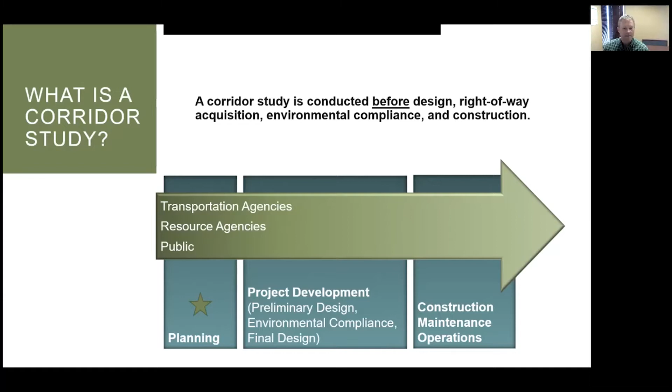All right, thanks Vicki. So I'm going to go over what we're going to cover today. First things first, we're going to go over the goals and purpose of the study. Then we're going to give you an overview of the existing physical features and some of the traffic conditions we've analyzed. We'll get into some of the environmental characteristics, and I'll have Emily step in and help with that. Then we're going to get into the next steps in the study process and get everyone up to speed with the schedule and where we're going, and then we'll open up for questions at the end. I have Lisa ready to show some interesting ways that you can comment and submit information to us.

So let's talk about the goals and purpose of the study. Like Vicki mentioned, we're going to start with a high-level scan of the study area. Then from that information, we're going to get into developing needs and objectives, which are essentially statements about what we know the corridor issues are and how to frame what we're going to look at as far as improvement options moving forward.

Improvement options could be anything from small improvements in the near term to large improvements in the long term. With that information, we'll estimate costs, assess potential environmental impacts, and look at the overall feasibility of each alternative. Then we compile all that information and data for use in the environmental process if a project moves forward out of this study.

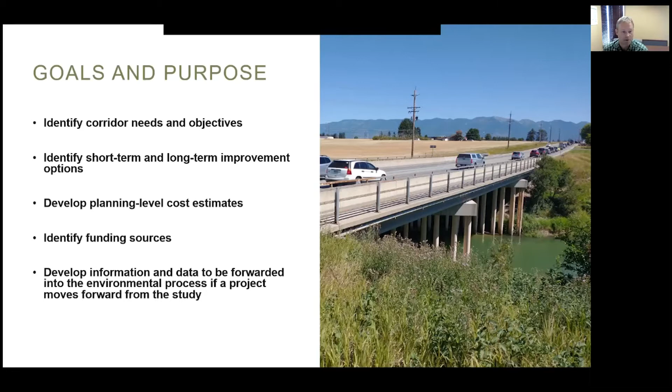So let's review the study area and background information from the research we've completed to date. Our study limits extend from US 93 at the intersection there, all the way to US 2 at that intersection. It also includes a segment of Whitefish Stage Road for about a half mile north of West Reserve, and extending about 300 feet south of West Reserve on Whitefish Stage Road.

We always look at these study areas as kind of a buffer. In this case, our study area includes a 250-foot buffer on each side, for a total of 500 feet on each of those roadways.

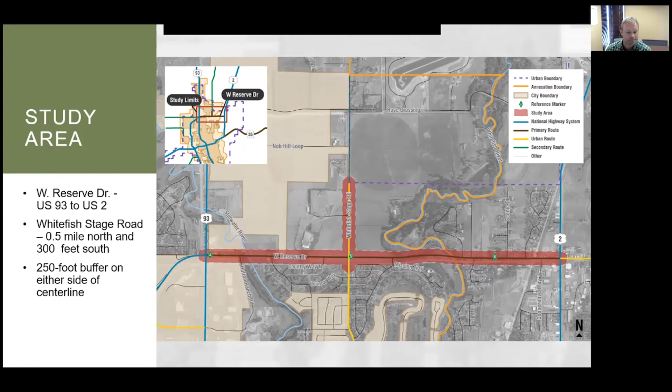A corridor study serves a wide range of uses. We're looking at West Reserve from the standpoint of commercial, agricultural, some industrial and residential uses that it currently serves. We understand there's rapid growth in the Flathead Valley, and that's contributing a lot of traffic and congestion to these corridors. We'll get into more detail on these traffic issues later.

Sarah is going to share some information with you. Again, we're only looking at basically US 93 to US 2 on West Reserve, and then a half mile segment on Whitefish Stage Road.

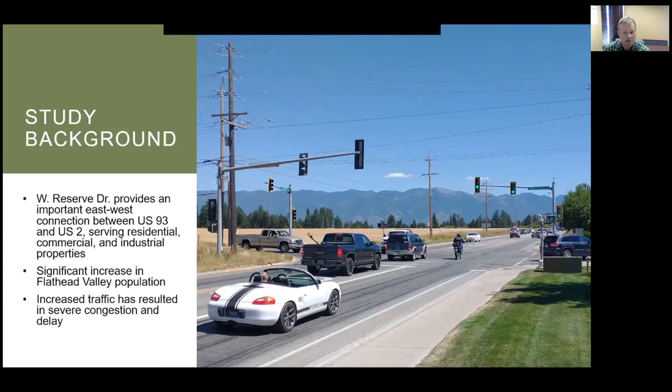We share all that information with the public, agencies, stakeholders, and so forth, to make sure we're not missing any information. That brings us to today, this first informational meeting, and we're here to gather feedback from you. We'll get into that with Lisa later, but we're here today to share information and then gather your input.

We take that input and look at the needs and objectives of the corridor. Things will rise up to our attention that need to be addressed, so we create statements that help guide us into developing improvement options. They essentially are criteria that we need to meet to develop an option to address them.

Once we have a whole suite of improvement options developed, we'll come back and meet with you again at a second meeting, which we're intending to be sometime in mid to late summer. We would gather input from you again on all that new information, then take that to the agencies and stakeholders, and compile it all into a final corridor study report. The time frame for that would likely be this fall - we're shooting for October of this year to wrap this up.

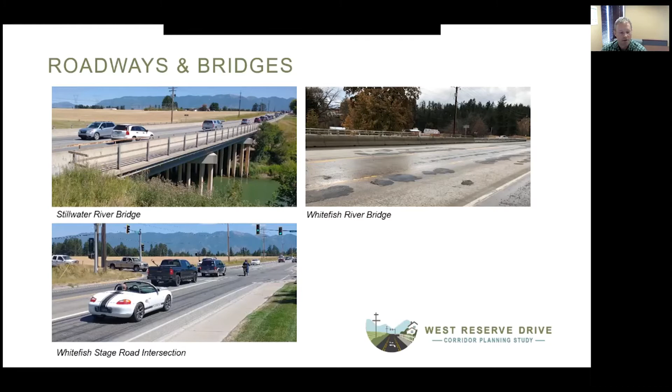When we examine the sidewalk and driveways, one of the things we notice is that there's quite a bit of sidewalk along the corridor, but it's somewhat inconsistent. There's sidewalk on both the north and south sides of West Reserve on the far west end of the corridor, but as we get towards the Stillwater Bridge, we lose some sidewalk on the north. It continues on the south all the way to the Whitefish River Bridge and just slightly beyond, but then it transitions over to the north again. So there's kind of a lack of connectivity, and there's no official crosswalk where it jumps across West Reserve.

The speed limit also decreases at the Whitefish River Bridge, going to 40 miles per hour, so that's also kind of a differentiator along the corridor. That also corresponds with a high number of residential and commercial driveway approaches. You've probably noticed there's a lot of driveways leading up to the US 2 intersection.

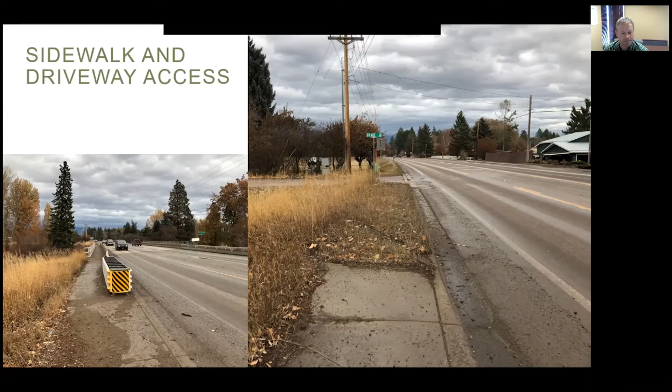This slide shows our existing average daily traffic volumes on the roads in the study area, measured in vehicles per day. On the west end of Reserve, we have about 18 to 20,000 vehicles per day, whereas the east end has a little bit lower traffic with 13 to 15,000 vehicles per day. As a point of reference, the planning level capacity of a 3-lane roadway, with 1 lane in each direction and a center turn lane, is about 18,300. So we're sitting right at capacity at that segment west of Whitefish Stage Road.

That's also evident from observing the PM peak hour, where we see a lot of congestion and delay on that segment, particularly in the eastbound direction, heading toward Whitefish Stage Road.

We looked at a variety of sources, including historic traffic counts on the corridor and other planning level studies, in order to estimate our 2040 traffic volumes. Based on this range of sources, we're estimating about 2.4% growth per year between now and 2040. Extrapolated out to 2040, we're looking at 30 to 32,000 vehicles per day on the west end, and on the east end of Reserve, about 22 to 25,000 vehicles per day.

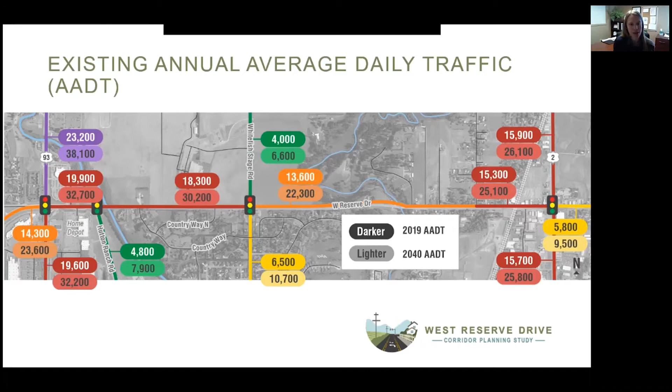We also looked at intersection level of service at 7 study intersections along the corridor. Level of service is just a measurement of the quality of traffic flow at an intersection. It ranges between A and F, with level of service E and F representing failing conditions.

I'll mention that we did our traffic counts for this analysis in October 2020, and recognizing that the COVID-19 pandemic has impacted travel patterns with people working from home, we compared that October 2020 traffic count to historic data collected in the last 2 years. From that comparison, we saw that the AM peak hour is about 10% lower right now due to COVID traffic impacts, while the PM peak hour was only about 3% lower, so not much of a difference in PM peak hour traffic volumes.

Based on that information, we used the historic traffic counts because we felt they were the best representation of corridor conditions at the 3 major intersections where we had that historic data, those being 93, Whitefish Stage Road, and US 2. At the other intersections where we did not have historic data, we factored those traffic counts up to account for those COVID traffic impacts.

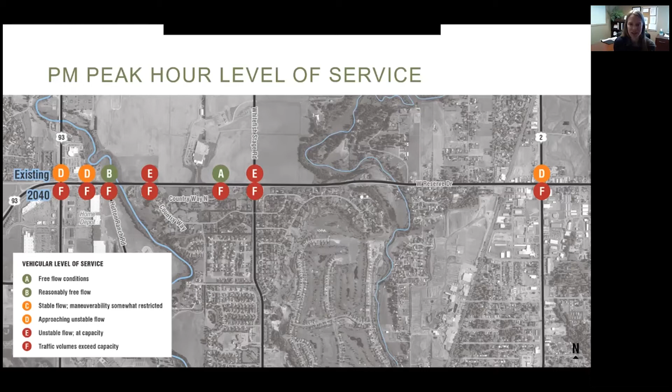That went from about 50 crashes per year in 2010 to about 100 crashes per year currently. Increasing crashes is attributed to a couple of things. We have development that has occurred over the last 10 years. The Hutton Ranch Road intersection was completed in 2012, and the Kalispell Bypass was completed in 2017. Those two intersections have increased the amount of turning movements on the corridor, which has naturally increased the number of crashes. Another contributing factor to the increase has been traffic congestion.

We've seen our traffic congestion increase over the last 10 years, which also contributes to crashes. When we looked at crashes by time of day, we saw that about 38% of crashes occurred between 3 and 6 p.m., which is when we have our congested traffic conditions. We also saw that the majority of traffic crashes were rear end collisions, which is a common crash type for a signalized intersection experiencing congestion and delay.

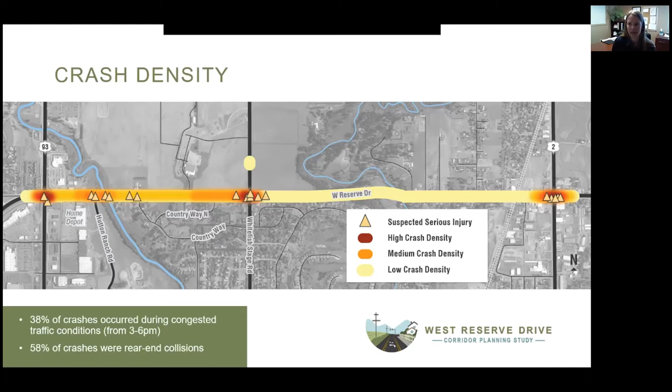And I'll hand it back over to Cody to provide some other summaries. Yeah, thanks. So from our review of the study area, we identified some key takeaways to consider as the study moves forward.

From a physical feature standpoint, we noted that there's closely spaced driveways with a lower speed limit on that east end of the West Reserve corridor. There's definitely some gaps and lack of connectivity from a sidewalk standpoint. The pavement condition is not great on the west, and it's really poor on the east.

From a traffic standpoint, we see that West Reserve is near capacity, as Sarah illustrated. And we have a couple of intersections that are technically already failed at this point, and we fully expect that all 7 of them would fail by 2040.

From a safety standpoint, we noted that crashes have actually doubled in the 10 years that we've been looking at the data, from 2010 to 2020, and that's a critical statistic. We also noted that the Whitefish Stage Road intersection has the highest crash rate. So with that, I'm going to turn it over to Emily to go over the environmental information.

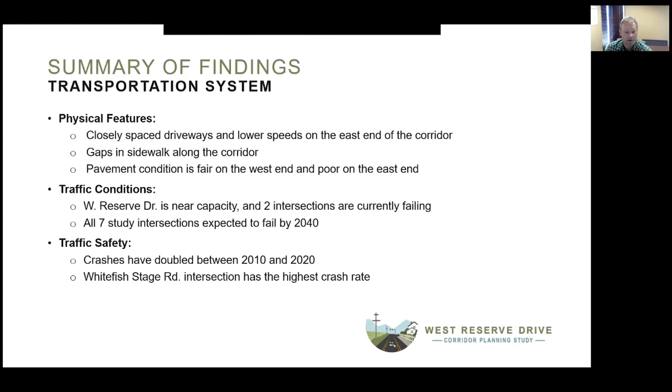Thanks, Cody. So as part of this study, we conducted a planning level overview of the existing physical, biological, social, and cultural resources that exist within the corridor to get a sense of what the environmental constraints and opportunities might be. Some of the resources we looked at were socioeconomic conditions, land use and farmland, wildlife occurrences and threatened and endangered species, wetlands and floodplains, hazardous materials, and cultural resources.

So I'm just going to briefly discuss some of the primary conditions that we identified. We did pull census data for this area, and as Cody and Bob have already noted, this area is seeing quite a bit of growth, and this growth is expected to continue over the next 20 years. We also noticed that in this area there is a high concentration of low-income and middle-income households, but there's also a very high concentration of very high-income households, which is indicative of a recreation resort type community.

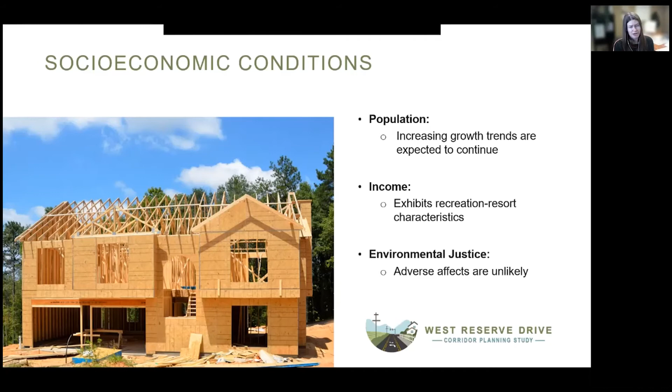We also looked at populations in the area that would be covered under environmental justice requirements and executive orders. These are essentially low-income and minority populations. And within this area, we did not identify any of these concentrated populations that could potentially be impacted by any projects that we move forward from this study.

Land use was certainly a big one within this corridor. As you can see from this figure, a lot of the land in this area has designated zoning. A lot of the undeveloped and agricultural land is zoned for future residential and commercial use, and the Kalispell North Center, a planned urban development, is also planned for this area. So with these land use changes, we expect quite a bit more traffic coming to this area. You'll also see along the Whitefish River the future annexation boundary for the city of Kalispell, so quite a bit of this corridor will be within the Kalispell city limits in the future.

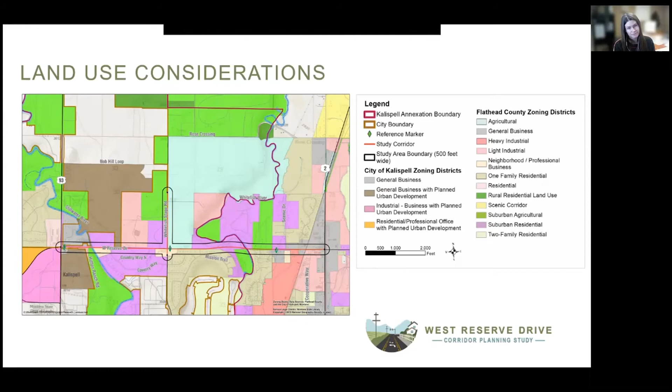On the aquatic resource and biological side of things, as Bob mentioned earlier, there are two rivers that cross this corridor, the Stillwater River and the Whitefish River. Both of these rivers are designated impaired rivers, and they're impaired because they do not fully support aquatic life beneficial uses. So that's something to think about as we look at improvement options.

The Stillwater River has set maximum daily levels of pollutants allowed within that river, and for the Whitefish River those maximum levels are currently being evaluated. Both rivers also have 100-year floodplains that we'll have to consider when looking at improvement options, and there's quite a bit of wetland vegetation along these rivers that we'll try to avoid if possible.

Both rivers have bull trout recorded within them, and bull trout is a threatened species. So when we're looking at potential crossing structures or how improvements will impact water quality, bull trout will certainly be something we have to consider.

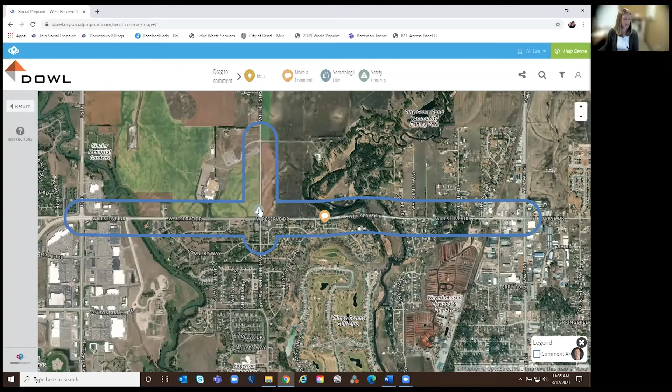This is probably where the real meat is on the map. It's interactive, so you can scroll in, zoom around, and look at where your house is related to the corridor. Then you can grab one of these pins from the top of the screen—they're labeled idea, make a comment, something I like, safety concern. Grab whichever one is most applicable and drop it on the map. For example, if you want to make a comment related to this interchange, you would drop it right there and make a comment. That helps relay more detailed information to the study team.

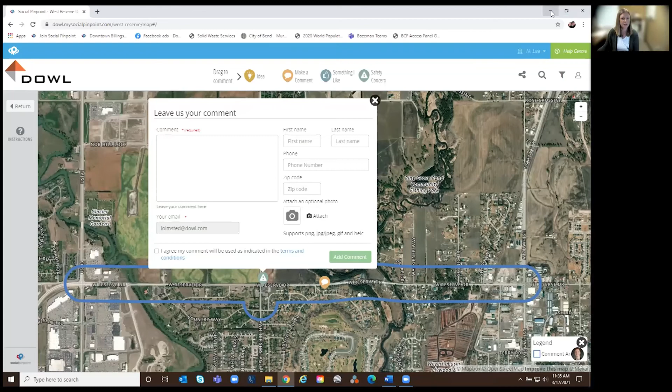The first question is related to the corridor map, wondering why the Whitefish Stage Road Rose Crossing was not included in the purview of the study, noting that Rose Crossing becomes another crossroad between Highway 93 North and Highway 2 East, appearing to create east-west traffic flow as well as increased north-south traffic flow—more so along the need for 3 lanes north-south for the 1 mile between Reserve and Rose Crossing, with enough right-of-way for expansion, and 4 lanes long-term while the open space is available. Vicki, do you want to touch on that question?

Actually, I'm going to punt this question to Bob because I believe there might be a project already planned on that secondary road, but I don't want to misspeak.

Thanks, Vicki. You are correct, and that is exactly why this project is basically not going to leave a gap between a project we already have underway, which is from the very north end of where we end this project, as you saw in the study, all the way to the intersection of Whitefish Stage with Highway 40. So that's another project already in the works. We didn't want two projects overlapping each other, but we also didn't want to leave a gap in between the two projects.